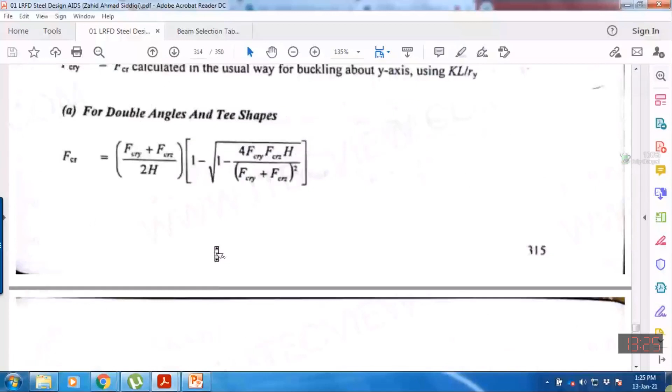Now Uzair, yes your question was about shear lag factor. Sir, in the table he has given value for single and double angle for weld 0.8, but if we calculate using the formula 1 minus x over L, then the value may come about 0.99, that is near 1. So which one should we use?

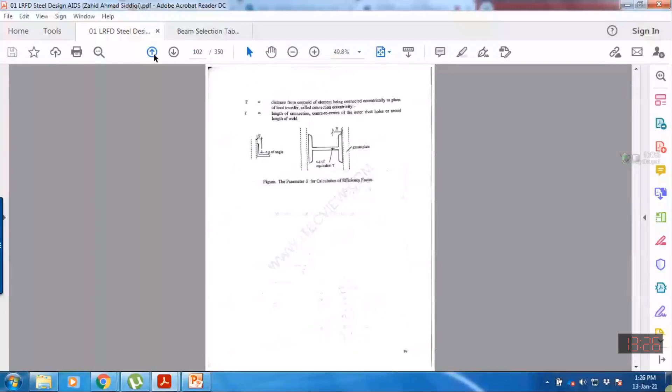Okay, let me first open the page. Okay, this was the page.

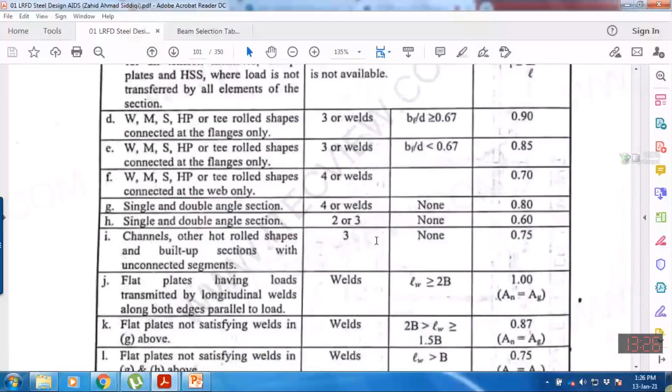Actually, I will let you know, but I got your question. What you want to ask - actually these are the guidelines to start the design. Okay, you understand me? So actual efficiency is to be determined by this formula.

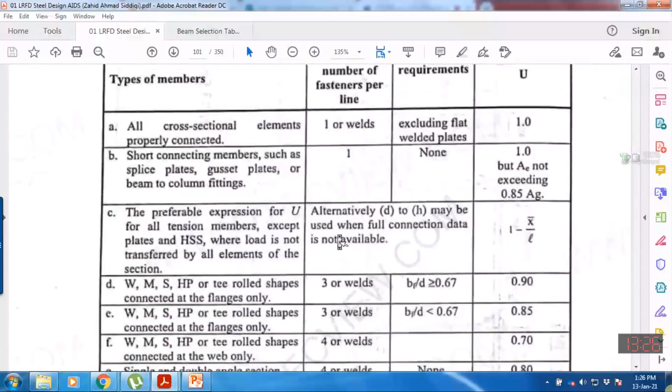If connection detail is given, then you have to use this formula. Okay, but at the start of the design, if you want to do certain assumptions, the assumption will be like this.

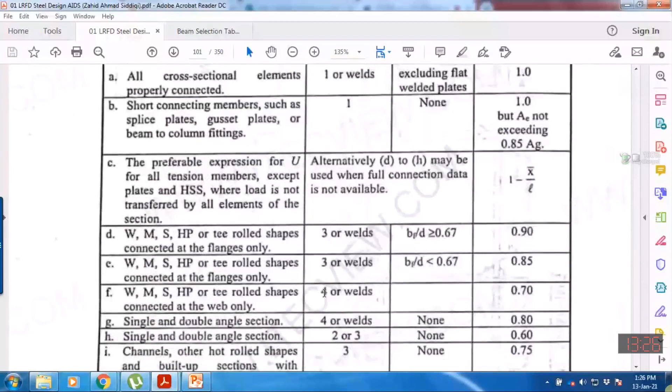Uzair, you got my answer? You understand? Sir, at the moment we haven't designed the welded connection, so we don't know if we are providing it longitudinally or transverse, something like that. No, no, no, no, no, no, no, no, no.

Why you should start designing the weld, because all the weld will be the same. You need to sketch the free body diagram by considering each member separately connected with the gusset plate. We have already discussed this, please review the connection design, okay?

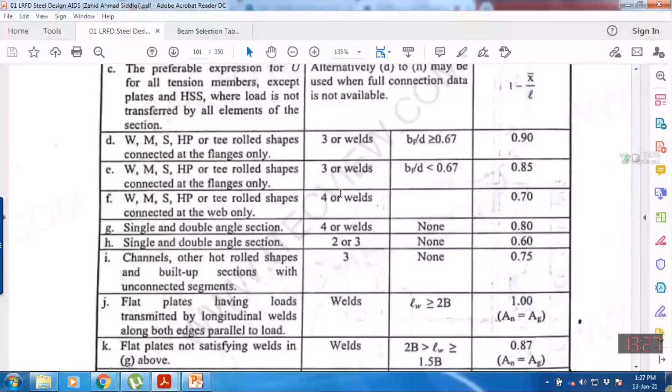Because at the start I will just give you the idea, because at the start you might have assumed certain value from this table, okay? And after designing the weld, we have considered one example.

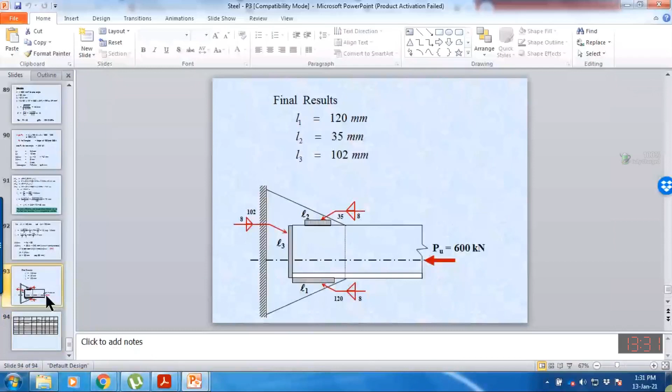I'm just quickly going through these guidelines we have discussed already. Procedure for the design of the welded connection, please review it. Okay, I urge you to review it because this procedure is given in your book. So what is the order?

Okay, and then if you will have any question, because it will be difficult for me to answer your question if you haven't reviewed the lecture. Okay, so when you will review my lecture, you will have some understanding, and then if I'm responding to your question, then you will be able to apprehend my answers.

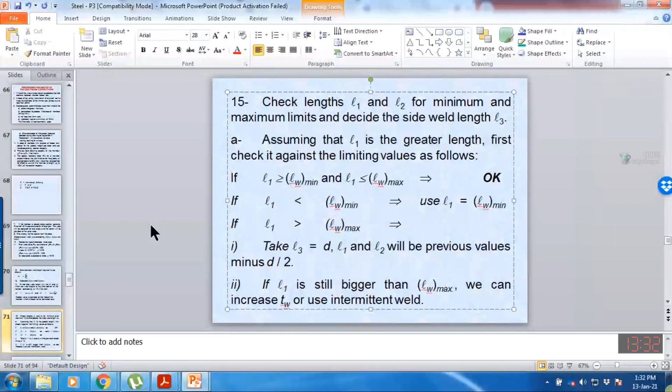So we have solved two examples. One example was design of the weld for the tension member. If we are having a simple tension member, for stress reversal, the member will have compressive force and tensile force, and whichever force is larger, you need to design the member for that force. If the compressive forces are larger, the weld will be designed for the compressive forces. If the tensile forces are larger than the compressive forces, then the connection will be designed for tensile forces. So this is the example of the tension member design.

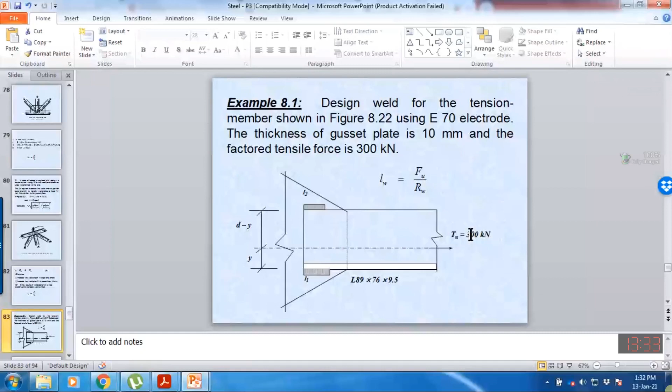For example, you need to sketch a free body diagram just like this. This member may be top chord, bottom chord, or diagonal, connected with the gusset plate. So sketch the free body diagram. For this member, you know the force, so we are supposed to use this formula.

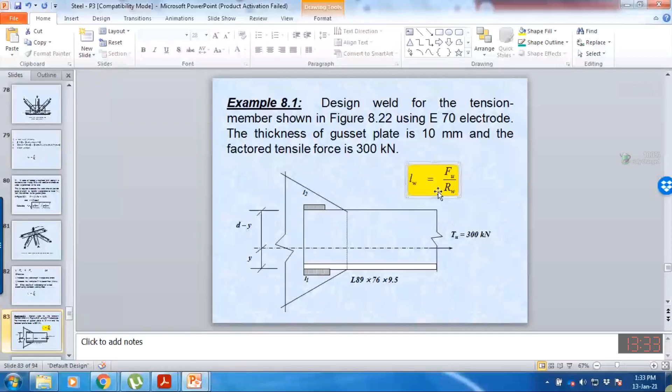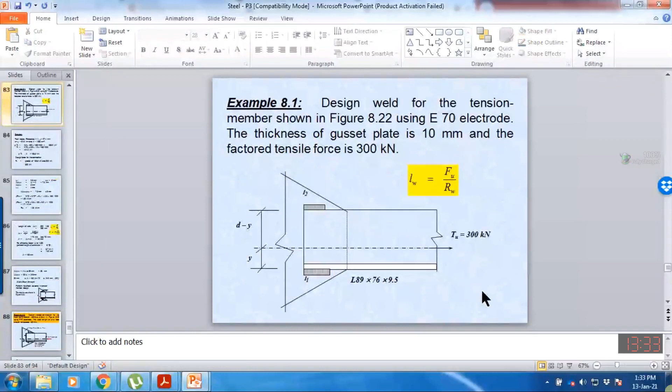You need to compute the length of the weld, and the length of the weld is equal to the design force divided by the weld value. So you will compute the design force first, and the design force is the factored tensile force or 50% capacity, whichever is larger. 50% capacity is 166.5 and the applied tensile factored force is 300, so Fu is the larger force. And then you need to compute the weld value.

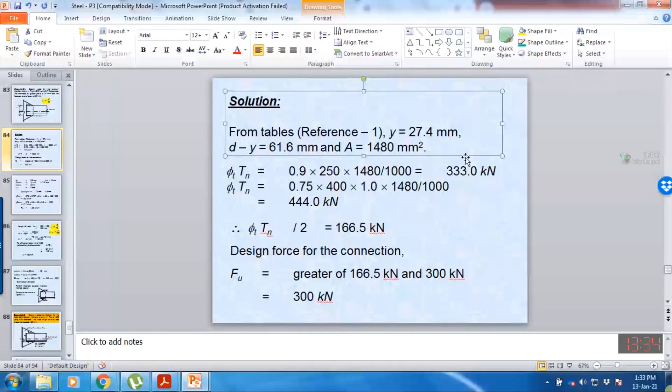For the weld value, you need to decide about the thickness of the weld. We have already discussed that you compute three thicknesses of the weld: T minimum, T maximum, and T optimum. T minimum is a function of TP1, the thinner plate, which is the thickness of the angle section, and TP2 is the thickness of our gusset plate. T maximum is TP1 minus 2. You arrange them in ascending or descending order, and the middle value will be our T adopted, which we have used as 8.

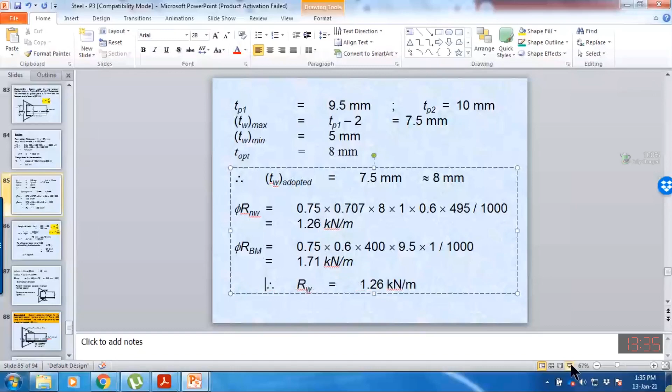Then, knowing the thickness of the weld, you compute the weld value. The weld value is based upon either the weld failure or base metal failure, and in that case the weld value is the lesser value out of these two cases: 1.26. After computing the length of the weld, which comes out to be 238 by this formula...

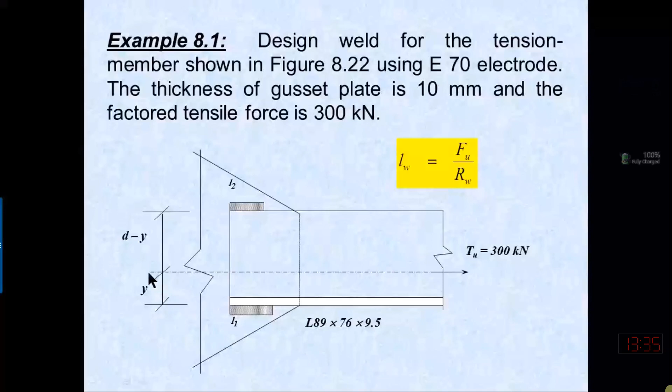...you are computing L1 and L2 because we are using this single angle. In the case of a single angle, since the centroidal axis is not in the center, you get the y and d-minus-y values from the section properties table, and you compute L1 and L2. You compute L1 to satisfy the equilibrium, so by using this formula, you compute the L1.

So this is the connection design, and we have also discussed this example for double angle. Is it double angle? Yes, double angle compression member. In that case, we have to use the L3 also. Please revise this, okay?

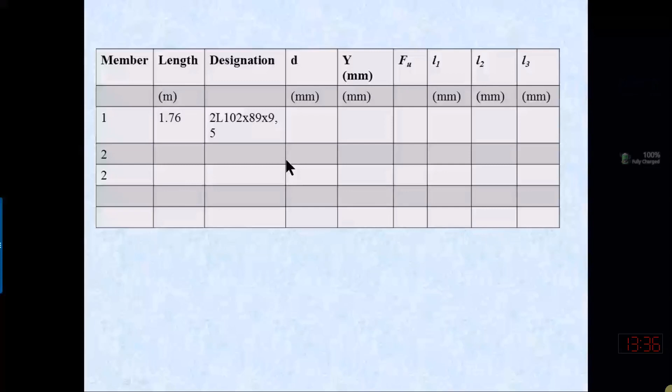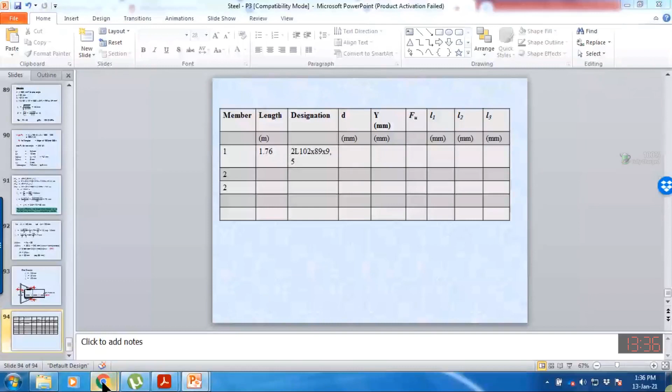So please revise it. Yes, Uzair, any other question? Any questions, gentlemen? So no one is having the question. Uzair, are you there? Yes, sir. Okay, so should I start today's lecture? Yes, sir.

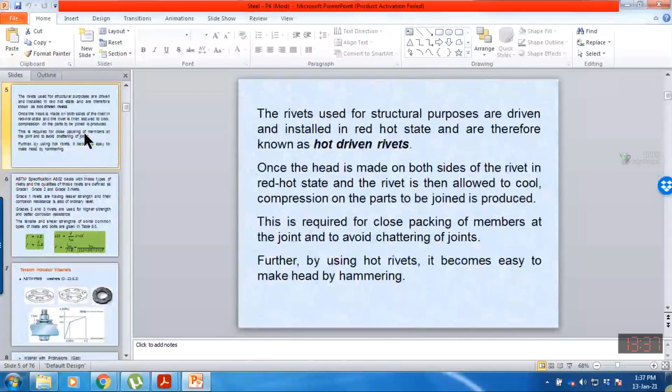Before starting today's lecture, I will quickly pass through the slides to see to what extent we have covered this. Next, we have started the riveted and bolted connection. The design formula will be the same, similar to the welded connection design, but instead of using the welding material, we have to use the fastener. A fastener may be a rivet or a bolt for the connection. Then, just like in the welded connection, we discussed the possibilities or types of failure that may occur in welded connection design.

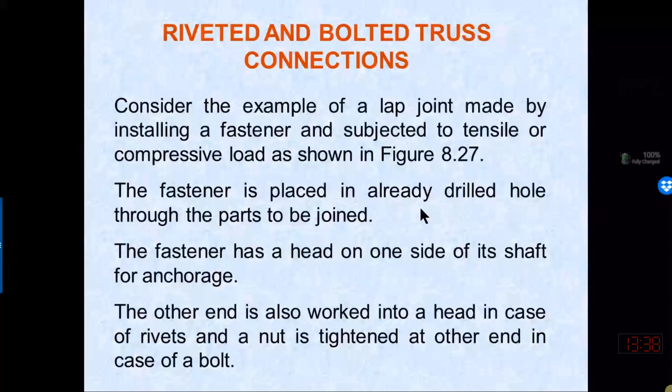Based on the strength of the welded connection, we have computed the weld value using two formulas, which are based upon the type of anticipated failure. A welded connection may fail either in shear of the weld, or the thickness of the plate along the length of the weld may be teared or torn. So we determine the weld value either based upon weld failure or base metal failure, and the least value is the weld value. Similarly, we need to check what are the possible failures in the case of riveted or fastener connections.

So first of all, we have to understand what type of stresses are being produced in riveted or bolted connections. I gave you the example that we have two plates connected by a fastener, and if they are applied with a tensile force, maybe this plate is being pulled on this side and this plate is being pulled on the other side. So two types of stresses are produced.

One possible failure is that this bolt may break from here, in between the intersection or interface of the two plates. If the bolt fails, it will fail due to shear forces or shear stresses, because these forces act parallel to the area which is failed or broken. Since the applied force was parallel to this area, the first possible failure is that the bolt may fail due to shear forces, and the shear force will be equal to this applied force.

And if the bolt thickness or diameter is very large, and the applied stresses are less than the shear strength of the bolt, then it will not fail.

Then other stresses which are acting are the bearing stresses. Bearing means that if I am pulling this plate to the other side, the area surrounded by the bolt on the other side is resisting all these stresses. This plate area, whose length is equal to the thickness of the plate, and whose width we can assume equal to the diameter of the bolt, is resisting all these stresses, and these stresses are only acting on this small portion.

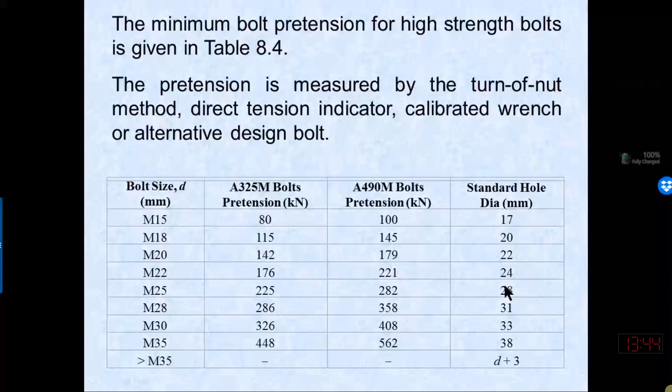Further, I have explained the concept of pre-tension.

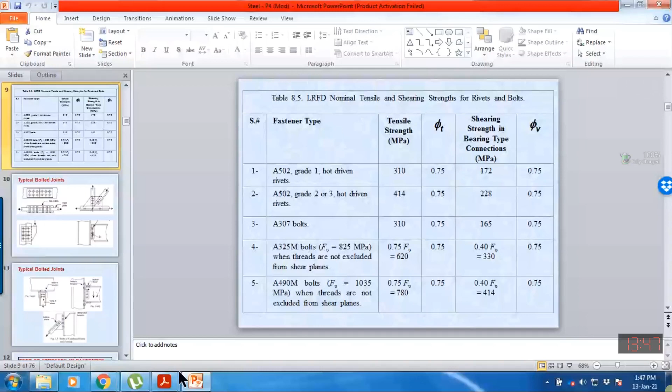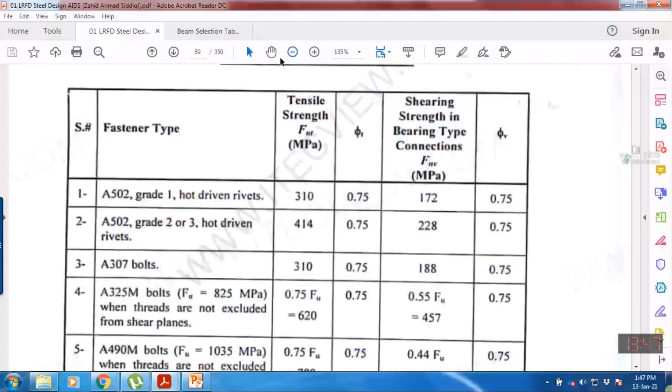I believe this table is also provided in our LRFD design aid, maybe page number... if someone can find it, let me know. Last time it was page number 88. Page number 88 — I'll tell you, you don't need to memorize it, page number 88. Yes, on page number 88 this table is given. So in the examination you will just be given this statement: use A502 grade 2 or grade 3 hot driven rivet, so you can consult page number 88 on the LRFD design aid and get its shear strength.

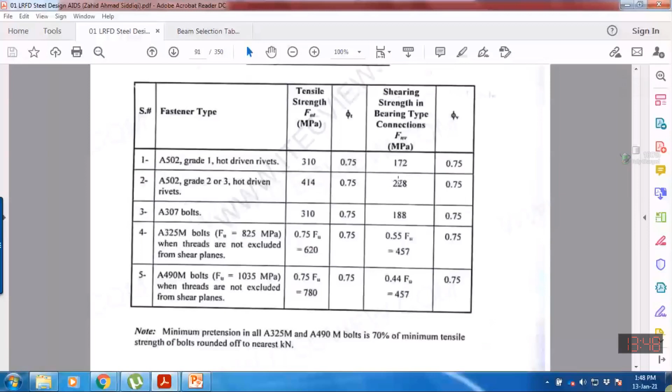So shear strength, if I divide, let's suppose 228 by 414, that is around 0.55, so it is assumed as 55%. In the previous lecture I told you that normally the shear strength is considered 60% of ultimate strength, but that is a rough calculation. We will actually discuss this in structural mechanics class next semester, when another teacher will let you know the exact pattern. But here you will come to know that the shear strength is considered as 55% of 414. So if you multiply 414 into 0.55, you will get exactly the answer 228.

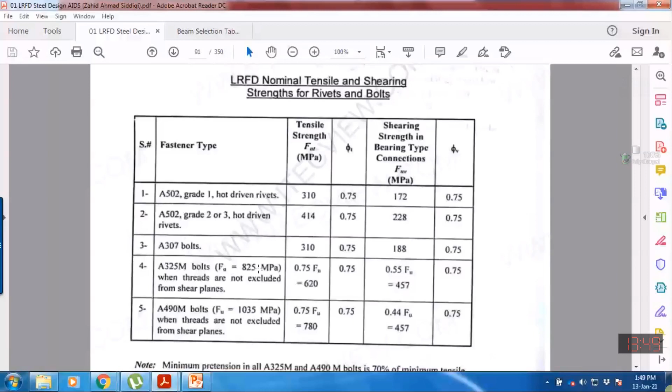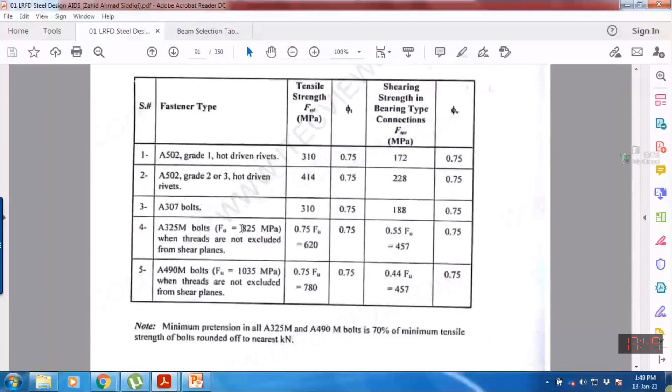So again, Fu is 825 megapascal. Just understand what is mentioned here — this could be a quiz question, gentlemen, I can ask this in the quiz. In case of the rivet, we are considering the complete tensile strength. But for the A325M bolt, this bolt has ultimate strength of 825 megapascal. However, in the tension member, if the bolt is in tension, we consider the tensile strength of the bolt as 620, which is 75% of Fu.

Why do we consider 75%? Because in the case of bolts, we have the helix, where we need to tighten the nut through the thread. So we assume that if the bolt is in tension, it may break from the threaded portion. The threaded area is assumed to be 75% of the area where there is no thread. So in tension, the bolt may always fail from the threaded portion, which is why tensile strength is considered 75% of Fu. But shear strength is considered 55% of Fu, not the same, because the threaded portion will not be available at the interjunction — for example, I will explain.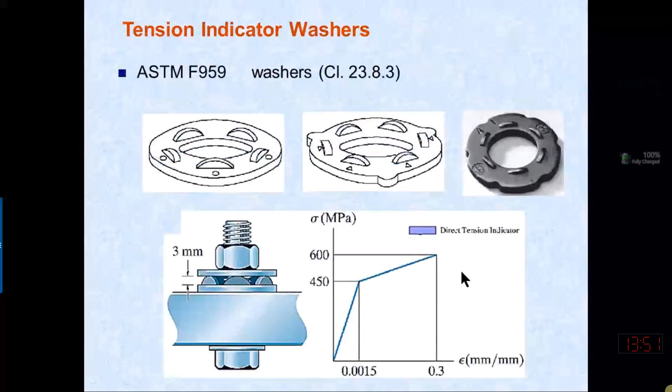Then we will discuss this thing.

Bismillahirrahmanirrahim. Dear students, inshallah, today we are going to discuss the type of stresses which are produced in fastener type of connection. Fastener type means either riveted or bolted, and depending upon these stresses, we can compute the stress or strength of this fastener type of connection. You have already seen a lap type of connection in figure 8.28 that we have already discussed.

Here we discussed that whenever a fastener type of connection for two plates connected with a fastener is subjected to compressive or tensile forces, two types of stresses may produce. Number one is the shear stress, where failure may occur at the plane of shear or at the interface of two plates. Or we might have bearing failure, the bearing stresses acting on one side of the bolt in any plate.

So the cross section at which the different layers of the fastener try to slide against each other is where failure can occur. The shear failure may occur between the interface of two plates because they can slide. They can only slide if the bolt or rivet fails through that plane, referred to as the shear plane. In that case, failure will occur due to the breaking of the bolt, and the diameter of the bolt will be broken.

The cross-section area which actually resists the shear force is equal to the cross-sectional area of the bolt, which is pi d square by 4. If we know the diameter of the bolt, we can determine the resisting area, the area resisting the failure. Failure may occur through the cross-section, and the cross-section area can be determined by pi d square by 4, where d is the diameter of the rivet.

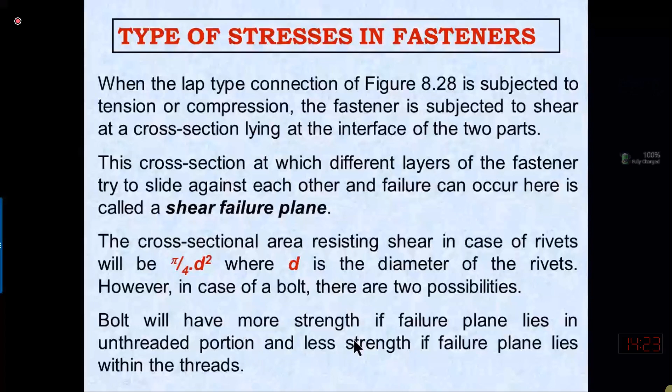However, in the case of the bolt, there are two possibilities. The bolt will have more strength if the failure plane lies in the unthreaded portion, and less strength if the failure plane lies within the threaded portion. How can I explain this? Do I have some pictures? Yes, I can explain from this picture.

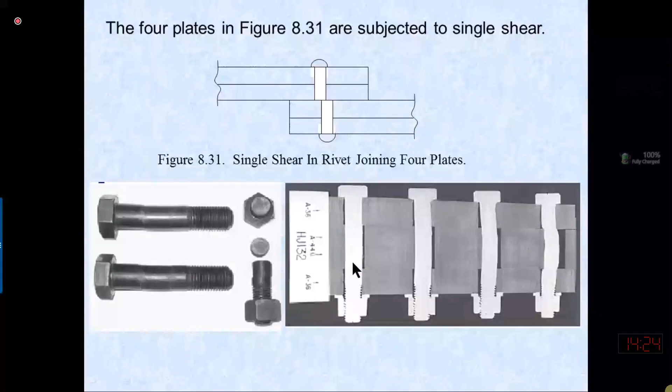But if the threaded area exists, so less area is available, the intensity of the stress will be more, and failure may occur at that point. So we will discuss it again one by one.

So, effective area of cross section resisting shear. In the later cases, shear means in the threaded portion. We can consider that the area of the threaded portion is approximately 75% of the total area. So we are subtracting 25% of the area due to the grooves or cutting of the metal to make the threads. However, adjustment for this reduction is made in the strength, and then the area calculated on the basis of outer diameter is used to evaluate the strength.

Because the fastener and plate are not fully joined with each other, the forces from the fastener are transferred to the plates by bearing stresses in the plate material surrounding the bolt on one side, as you have already seen in the figure. So he wants to say that, because in the previous figure, where was that figure?

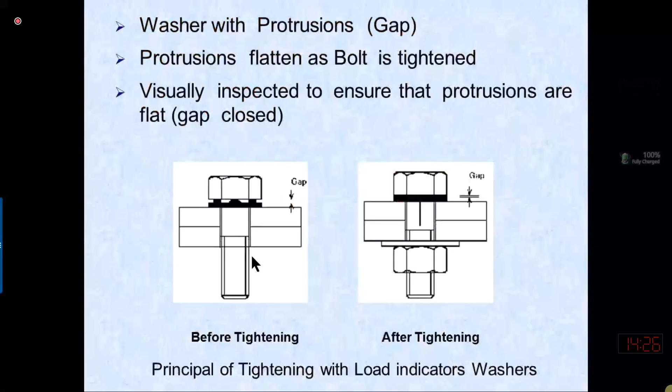It means that either this plate may fail due to yielding of the material, because it is transferring the stress, and the area of this plate which is transferring the force from the plate to the bolt has a length equal to the thickness of the plate and a width equal to the diameter, for approximate calculation.

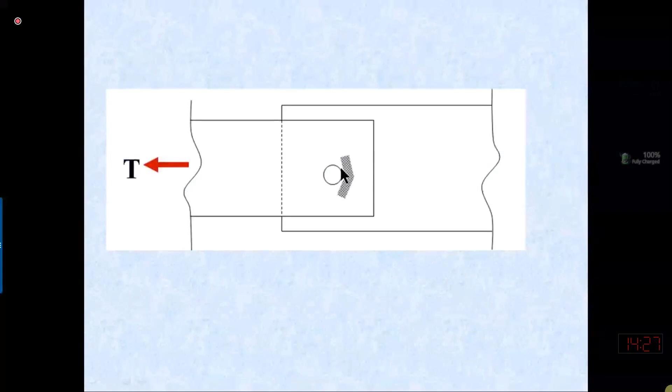So how do we compute the bearing stresses produced in the plate within the contact area of the plate and bolt? Bearing stresses are very high, local compressive stresses produced when two surfaces abut each other and transfer the load. Abut means they are meeting with each other and transferring the load. If sufficient material is available around the zone of high bearing stresses, then these stresses quickly spread over a greater region, reducing the intensity. The locally stressed material is confined in nature.

For this reason, and because local compressive stresses cannot produce fracture, bearing stresses up to three times the ultimate strength can be assumed. Okay, let me explain this, what he wants to say.

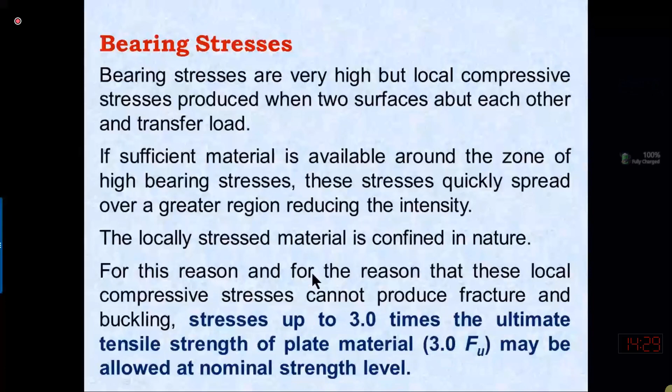Let me explain from here. In this diagram, let me sketch some areas. Just assume, for your understanding and clarity, that this is the area which is subjected to bearing stress. Let me change the color... it's better to change this color. Let me use red.

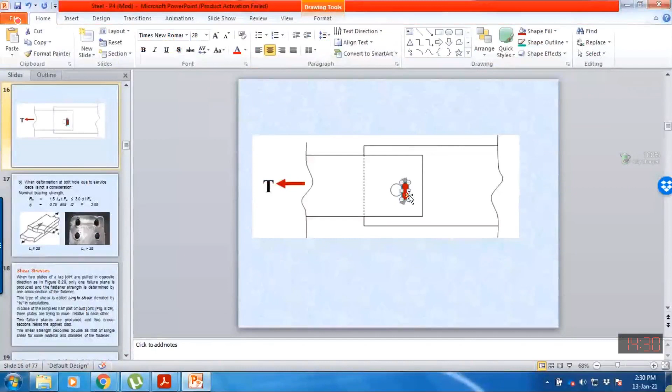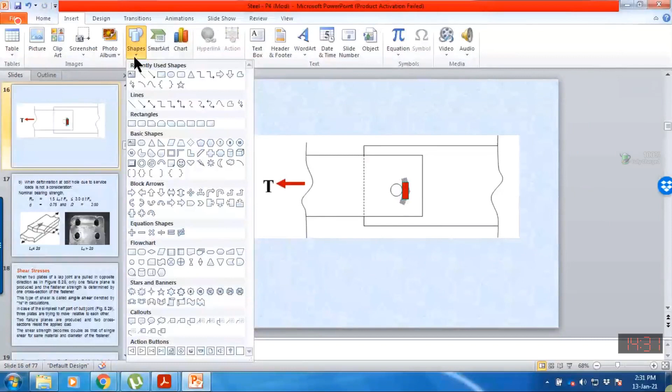Just for clarity, bearing stresses are only acting in this region, and this area has a length or width equal to the diameter, and the thickness equal to the thickness of the plate. So only this area is resisting the complete force. At this point, for example, if I sketch a line over here, let's suppose at this cross section of the plate, the total stress will be equal to T divided by this area, as you already know.

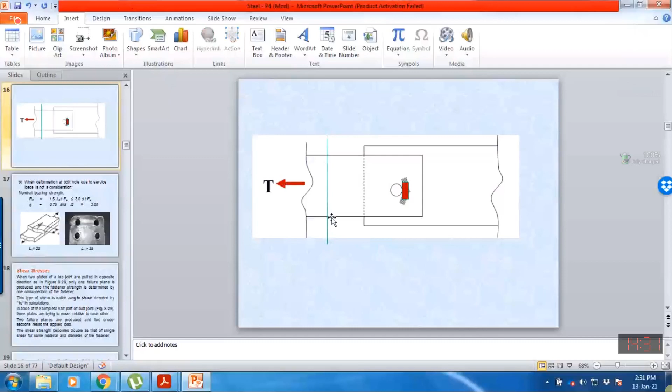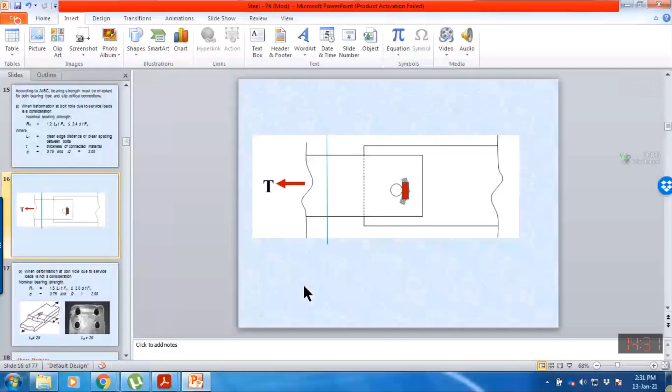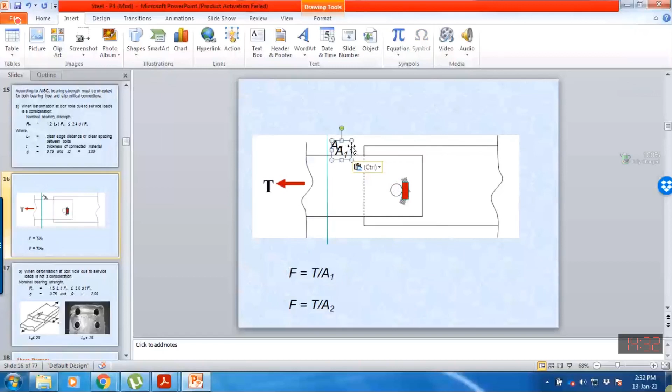If I have some equation from before, you can say that the stress, which we denote as F, is equal to P over A. Let's suppose I call this A1. And similarly, let me use T, because T is the force acting. That is A2, and that is A1. You may consider A1 as this area, and similarly A2 as this red area, which is under bearing and resisting all the force. So T is the same in both cases. What do you think? Because F1, let's suppose, just to understand more, I'm referring to it as F1, and I'm calling the other F2.

F2 are the stresses produced in this bearing region and F1 are the stresses produced in the plate. T is the constant, so F1 will be less because A1 is larger. For the same tensile force which is to be transferred from this plate to this bolt, only this area of the plate which is in contact with the bolt is transferring the load, not the entire plate. So this area is the bearing area, which is very less, A2. A2 is very less compared to A1, so F2 stresses in this bearing region will be more. So it means F2 will always be larger than F1. So if T is increasing, there are chances that F2 will approach the yield value first.

So due to the very less area, this material may be yielded. But at the same time, you may consider that...

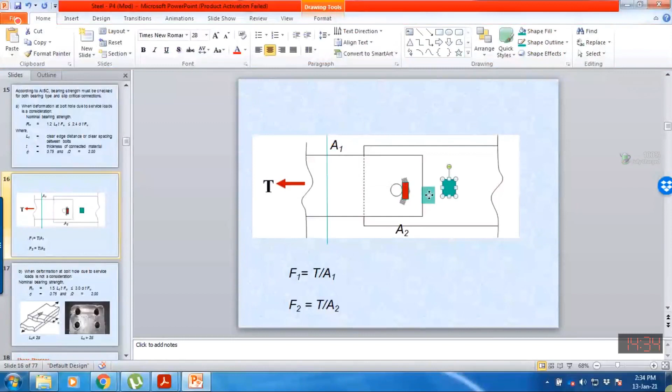Yielding occurs only at this very small portion, and this area is in compression. Let me consider some material on the three sides - one side top, one side bottom, and one side at maybe the third. It means the material which is yielding is surrounded from all three sides, not four, because on this one side, the fourth side, we have the bolt. This material is not yielded because it is still in the elastic range.

So what happens when this material is yielding? Due to compression, this material will tend to shorten in width. So if material shortens in thickness, it will need to expand in the lateral direction. But it will not expand. Why will it not expand? Because this yielded material is surrounded by elastic material from the three sides, or confined by material which is not subjected to stresses, and this material on the sides will not let this material deform.

So what happened? This is called the local confinement effect. What is the local confinement effect? When a very small portion of the plate is yielded, or if localized compression yielding failure occurs, the material after yielding tends to expand or move in the lateral direction, but the surrounding material which is still in the elastic range will not let this material move laterally. This phenomenon is called local stress confinement, and it actually increases the load carrying capacity.

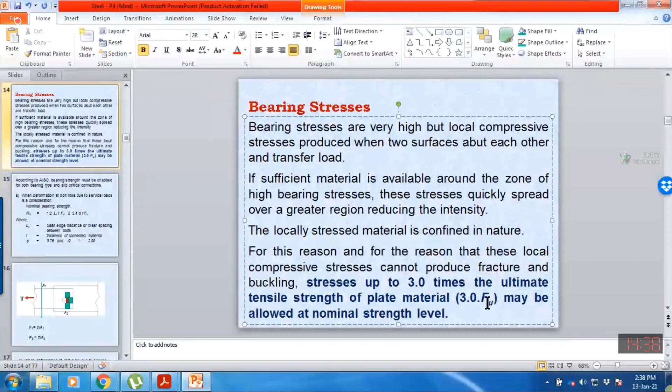Due to this reason, the ultimate strength is considered as 3 times Fu. We assume that due to bearing, the strength is equal to 3 times the ultimate strength, because the failure will only occur if the applied stress is 3 times Fu. Why 3 times? Because it is surrounded by elastic material from the three sides. If this material also yields or breaks, then failure will occur.

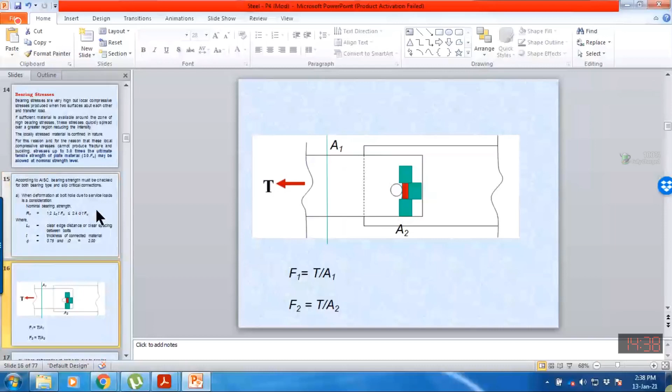Then there is one further thing: there are two formulas to compute the bearing strength, or two possibilities of failure. Number one, let me sketch this diagram. Control A.

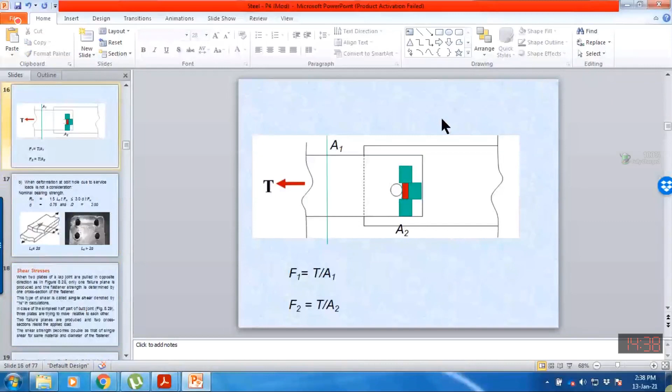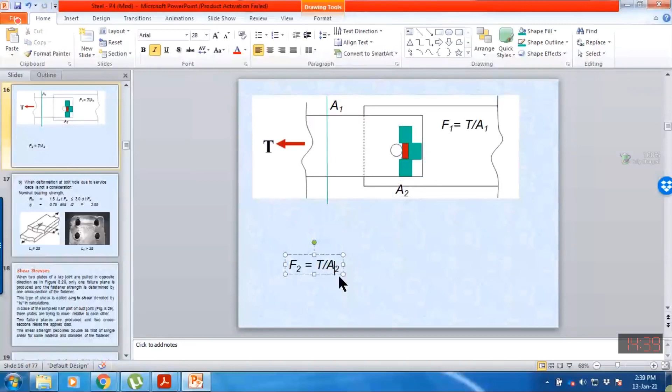And let me copy this formula here, and I need to copy this diagram again. We want to consider some bearing strength, which is actually a function of the clear edge distance. What is the clear edge distance? That is this value.

You can say that from this edge, this value is the distance from the edge of the bolt, or the distance from the edge of the side of the bolt to the edge of the plate. It is referred as LC, clear length or edge of the bolt available. We are referring to this distance as LC. So what is this distance representing? Because the formula to compute the bearing strength is different depending on this.

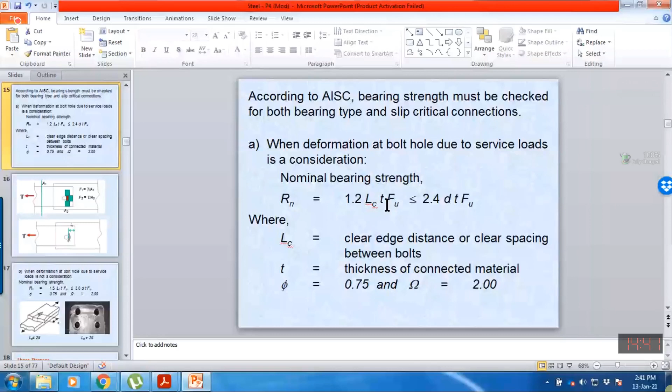In the first case, when deformation at the bolt hole due to service load is considered, then the nominal bearing strength is computed using service load, meaning without being multiplied with factor of safety. Actually, I'm not going to discuss this formula because this is the formula for the ASD method. In ASD method, load carrying capacity equals 1.2 times LC into T and Fu. I will explain how it is computed. So actually this slide is for the ASD method, but we are discussing it because we are considering the design strength.

So let me introduce the formula again here. The formula is: stress equals applied load. Instead of T, I'm assuming applied load is Ru. And for nominal capacity, bearing capacity, that is Rn. So if you want to compute the Rn value, Rn will be equal to F into area under bearing. This value may be Fu or Fy, and we need to determine what area under bearing to use. Let me copy this formula also here.

So there are two conditions actually. If LC is less than 2 times the diameter... so what LC have I mentioned? If LC, this clear edge distance, is less than 2 times this diameter, then it means we are having a very small edge distance. Then in that case, instead of bearing failure, because edge distance is very less, the plate may be torn from here. Tear failure means that the failure will be occurring from here. If clear edge distance is less than 2 times the diameter, then the plate will be torn from this end.

In that case, capacity will be computed by this formula: 1.5 times of the area. Let me put that in brackets. So what area will be used to compute the strength, or which area is resisting the stress? LC into T. So if failure will occur from here, we have to consider the failure area, which will be equal to LC because this plate will be torn from here. So the area which will be torn is equal to LC into thickness of this plate. So nominal strength will be 1.5 times the area which is resisting the bearing stress, into Fu.

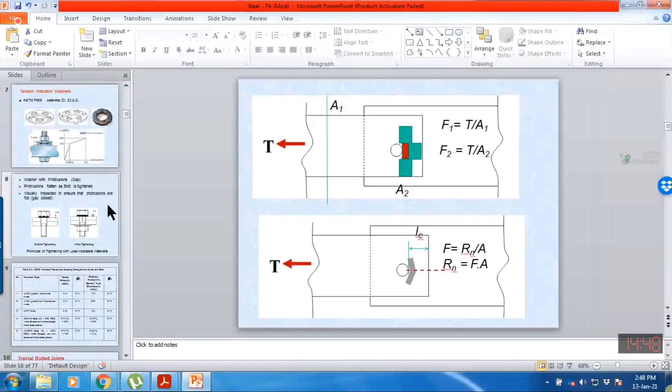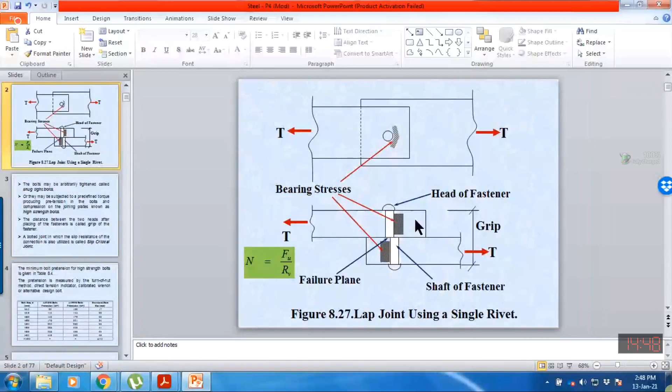And if LC is more than 3D, then the area of yielding will be used differently, as diameter into thickness. The area which is yielding has the width diameter, and the thickness we have already discussed, because this area is yielding. So the length is equal to thickness of the plate, and of the smaller plate. If the two plates have the same thickness, then any thickness may be used. Otherwise, the thinner plate will be used. So the area will be different.

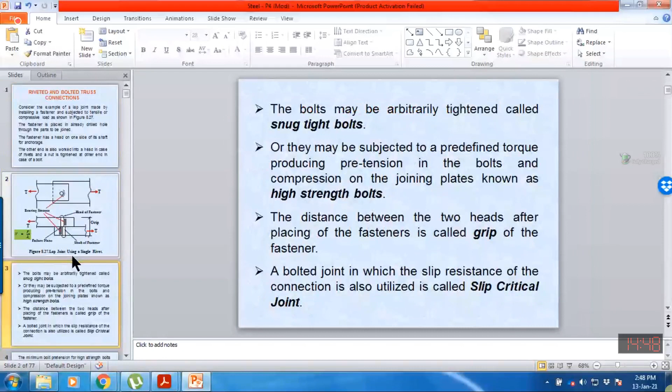So where were we? We were discussing the two types of failure. So why are we using these three? Because the bearing failure will only occur if the stress will be 3 times of FU due to local confinement effect. Here the confinement effect is just considered as 50% more, but here 200% more than the FU value. So depending upon the clear edge distance, we have to investigate the bearing strength. And 0.75 will be the strength reduction factor, so we need to multiply this equation with that value to compute the design strength.

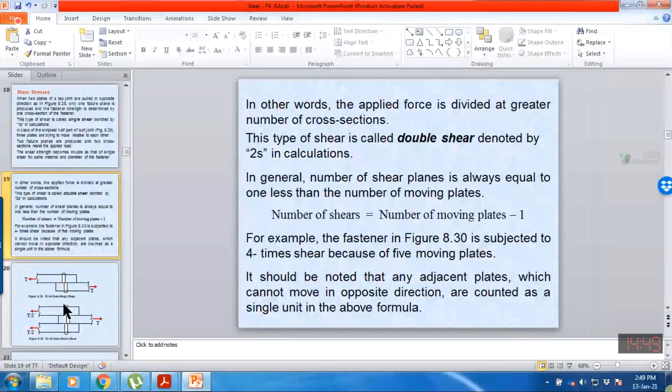Next is the shear stresses, which may occur in the bolt at the interface. Depending upon the number of plates, we may have single shear or double shear failure. For example, when two plates of a lap joint are pulled in opposite directions, only one failure plane is produced, and the fastener strength is determined by the one cross section only.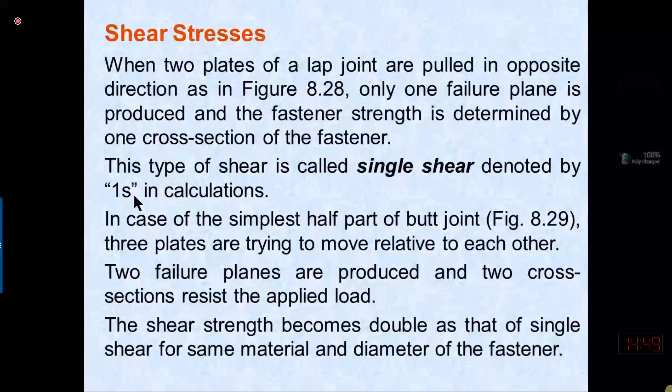This type of failure is referred to as single shear, where we have only one shear plane. But if more than two plates are connected with the same bolt, then the number of shear planes will be more, so the applied load may be resisted by two shear planes. The number of shear planes normally equals the number of plates minus 1. I believe you have already studied the concept of single shear and double shear in strength of materials.

Here we have two plates connected by a bolt, so there is only one plane which is resisting. So only one interface, or sliding, may occur only at one sliding plane. This means that one bolt resists the shear stresses only at one plane. So if we are connecting three plates, then we have two planes where sliding may occur, and one bolt resists the same force at two places.

So it means that one force, total force T, is being resisted by one area here. But here, total T force is being resisted by two areas. So it means that the capacity of this bolt will be more as compared to this, or the stress in this case will be half, because the number of shear planes are more.

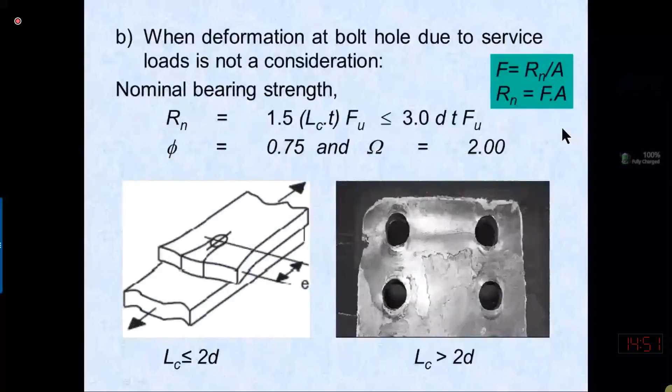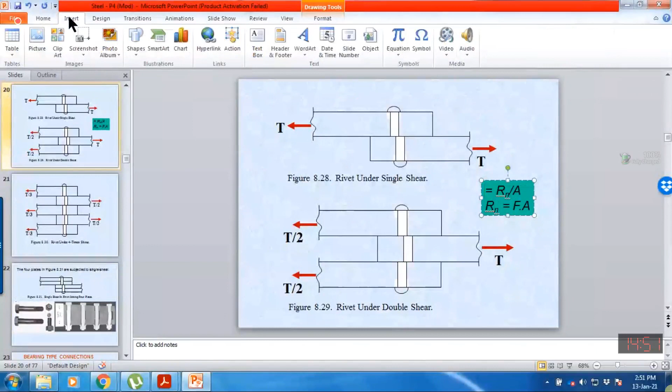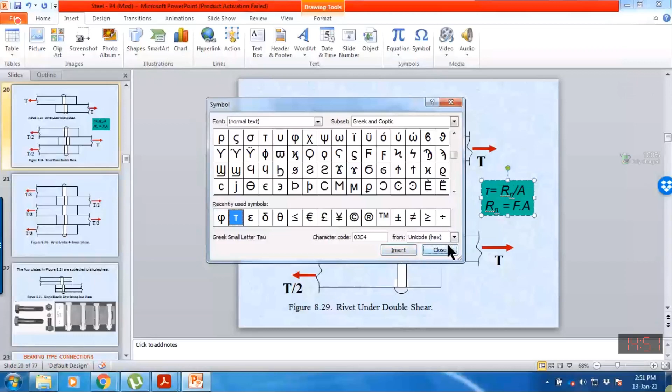So if you want to modify this formula, let me represent the shear stress as tau. Okay, let me use the same symbol, we can change it. Or simply, let V be shear force, or these shear stresses which are equal to shear force over the area. So you can further multiply with the N value, where N is the number of shear planes. You can call it total N, so more will be the number of shear planes, less will be the shear stresses. That is depending upon this case.

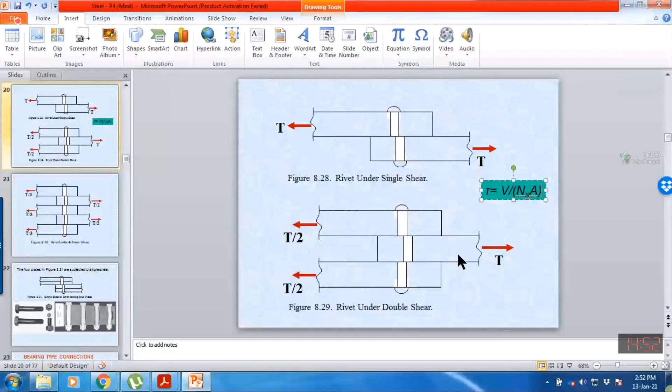Here you can see I have given an example of how shear failure may occur. Three plates are connected with the fastener, and you can see that due to sliding, rupture failure occurs here, shear rupture, and also shear rupture will occur here. If the plate is strong enough in bearing, it will break from here. So that is a double shear.